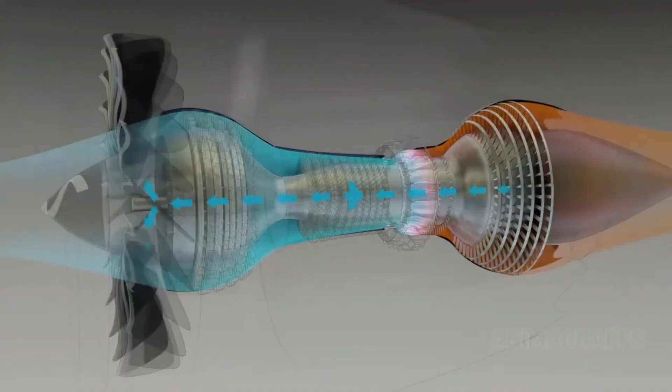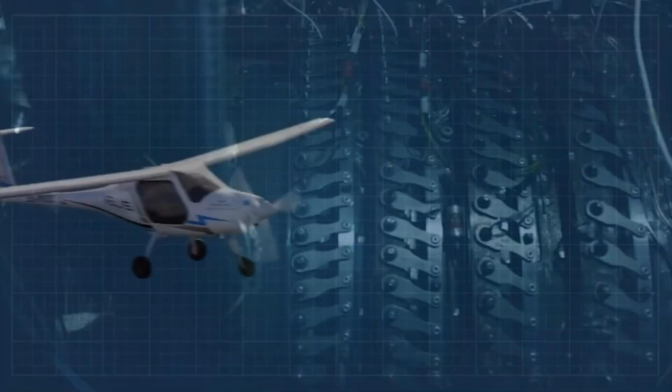We're on the brink of a revolution in aviation. But could this new hybrid engine actually push the industry forward, or will it just leave us grounded in more problems? For years, aircraft designers have explored electric propulsion due to its promise of quieter flights, lower emissions, and reduced fuel use compared to traditional engines.

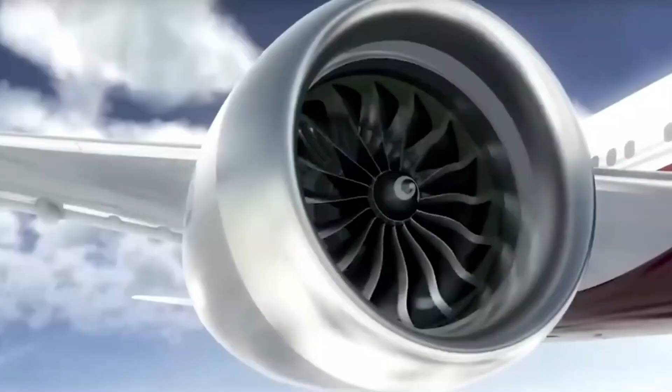However, adopting this technology hasn't been straightforward, mainly because energy storage systems like batteries are heavy and limit how far planes can fly. As the push for greener aviation grows, efforts to develop electric and hybrid electric propulsion have intensified. Since the 2000s, many electric-powered aircraft designs have emerged. NASA predicts that by 2035, commercial planes will start using electrified propulsion systems.

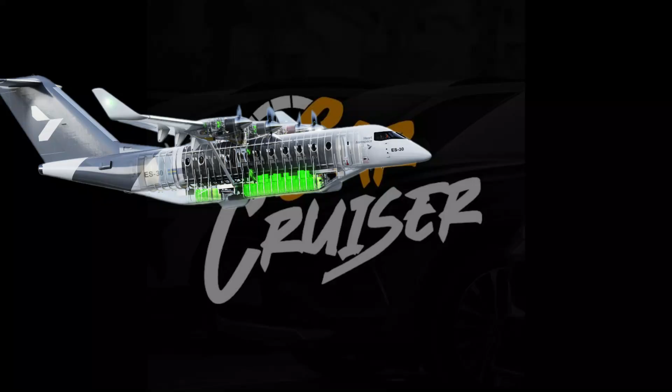A hybrid electric aircraft combines traditional fossil fuel engines with electric motors to power the plane. Typically, electric motors handle takeoff and landing, while fuel engines take over during cruising. The electric motors run on batteries or energy sources like fuel cells. Although HEA technology is still in its early stages, it's gaining attention for its potential to make air travel greener, much like the impact of electric vehicles.

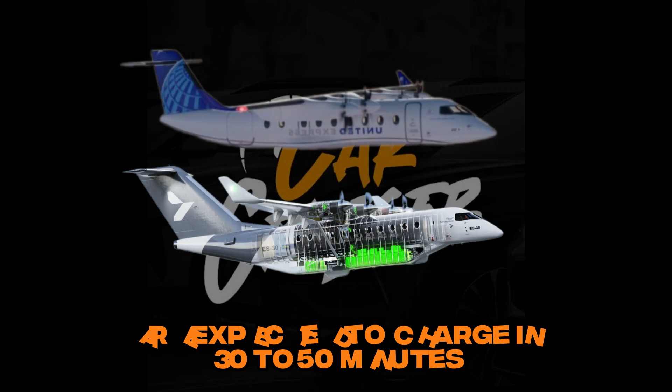Well, charging time for HEAs depends on the aircraft's size and design. For example, Swedish manufacturer Heart Aerospace's Heart ES-30 planes, ordered by airlines like Air Canada, United, and Mesa, are expected to charge in 30 to 50 minutes. In earlier tests, engineers from the University of Cambridge experimented with a hybrid electric plane that could even recharge its batteries mid-flight, showcasing innovative possibilities for this technology.

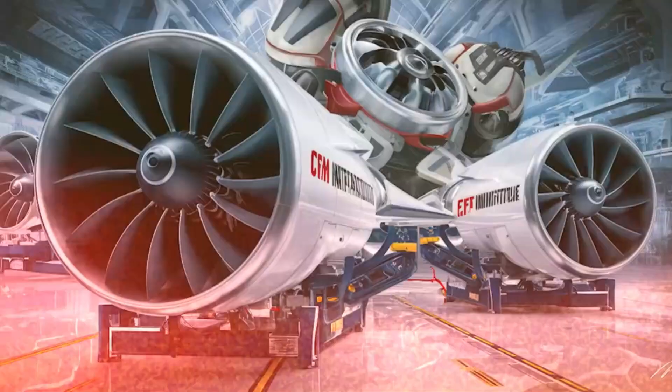The range of a hybrid electric aircraft varies depending on factors like size, weight, energy storage capacity, and flight conditions. The Heart ES-30 can cover 125 miles purely on electric power, or 250 miles when using a turbine generator fueled by sustainable aviation fuel. Other HEA projects are also pushing boundaries.

For instance, Lilium and City Airbus focus on urban mobility. Boeing Aurora eVTOL and Bye Aerospace Sunflyer 2 aim for regional travel. Some business and regional aircraft claim ranges of up to 621 miles with seating for around 10 passengers.

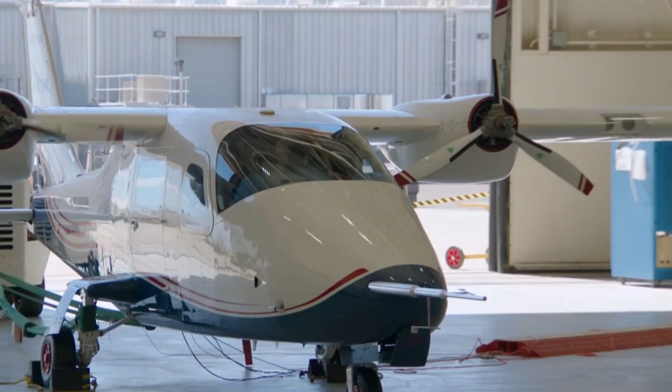The primary fuel source for HEAs depends on the design of the aircraft. Most still rely on aviation fuel, including sustainable aviation fuel, which is a more eco-friendly alternative to traditional jet fuel. But the electric motors, which power key phases of the flight, are typically fueled by batteries. These batteries can be charged using a variety of sources, everything from conventional grid electricity to renewable energy like solar or wind power. The possibilities for charging are expanding, making HEAs a promising option for reducing carbon emissions in aviation.

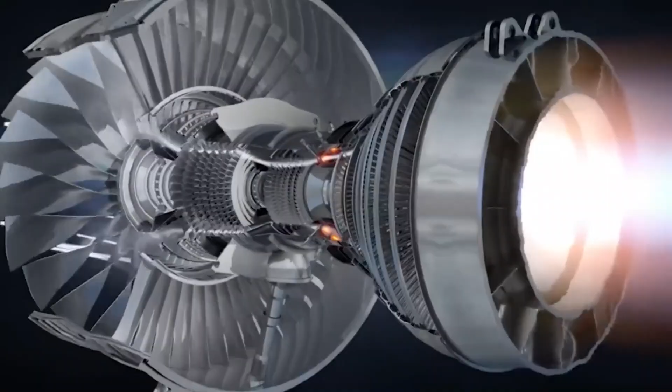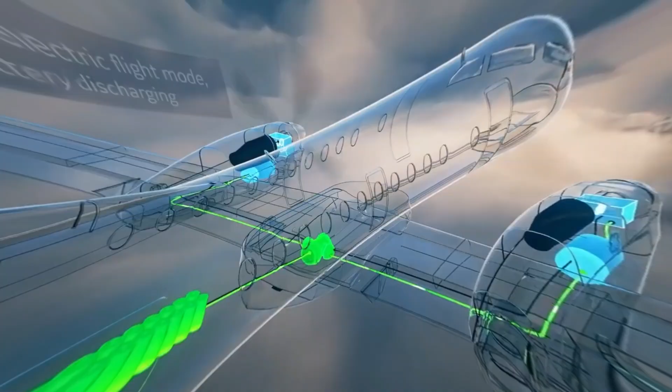Now, a hybrid electric aircraft consists of a few key components working together to make that magic happen. First, the traditional engines provide primary propulsion during the cruise phase of flight. The electric motors take charge during takeoff, landing, and sometimes during cruising to reduce fuel use. The electric motors are powered by an energy storage system, which could use batteries, fuel cells, or a combination of both. There are also electronics to control how electricity flows between the motors, storage systems, and traditional engines, ensuring everything runs smoothly. The control systems make sure the engines and motors work in sync, maximizing efficiency and safety.

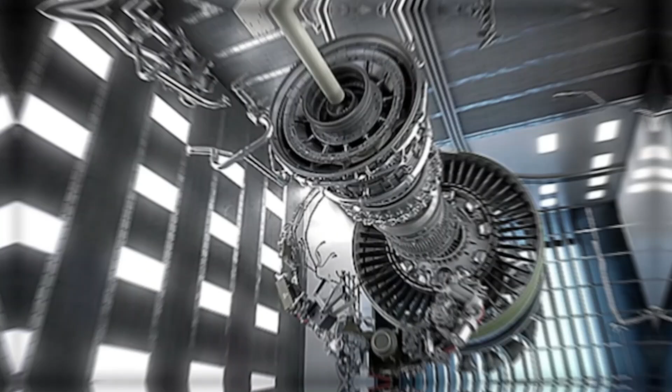Hybrid electric aircraft are designed to reduce fuel consumption, particularly during the fuel-heavy phases like takeoff and climbing. Electric motors provide an extra boost during these stages, reducing the workload of traditional engines. When the plane reaches cruising altitude, the conventional engines can take over. As the aircraft descends and prepares to land, the electric motors kick in again, helping slow down the plane and cutting down on noise pollution.

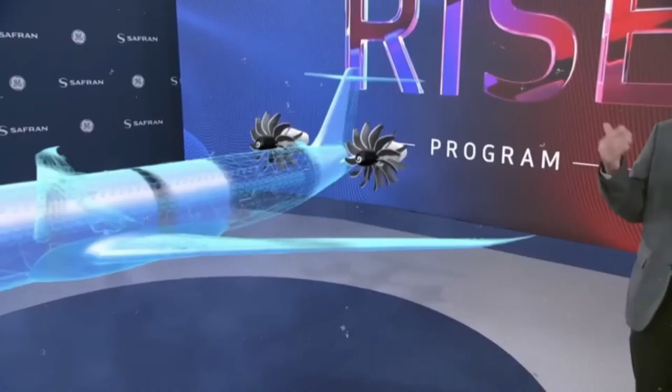This hybrid approach can significantly reduce fuel burn, especially by minimizing the use of traditional engines during takeoff, climbing, and landing. The result? Less fuel consumption and a greener flight experience. It's clear that hybrid electric aircraft are a key player in the future of eco-friendly aviation.

The technology behind hybrid electric aircraft is advancing rapidly, especially in the areas of battery development, electric motor efficiency, and alternative fuel sources. One of the most crucial breakthroughs is the development of lighter, more powerful batteries. These batteries are the key to extending the range of HEAs, allowing them to fly longer distances without the need for refueling. As battery technology improves, HEAs will become more practical and efficient, making greener flights a reality.

But it's not just about batteries. Electric motors are becoming more efficient, meaning the entire propulsion system is operating at higher efficiency levels. Alternative fuels, like biofuels or hydrogen fuel cells, are also playing a significant role in reducing the environmental impact of HEAs, pushing the technology towards even greater sustainability. On top of that, power management systems are getting smarter, optimizing the use of both electric and traditional energy sources for the best performance and fuel efficiency.

Materials and aircraft designs are evolving as well. New materials like carbon fiber composites help reduce the overall weight of the aircraft, boosting its efficiency. Modern aircraft designs, such as distributed electric propulsion or tilt-wing configurations, are offering new ways to enhance performance while keeping things light and efficient.

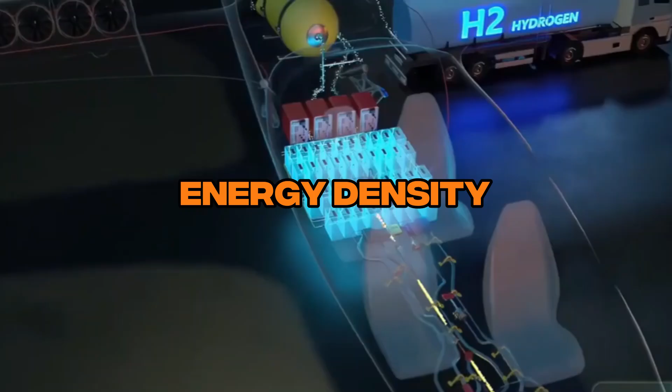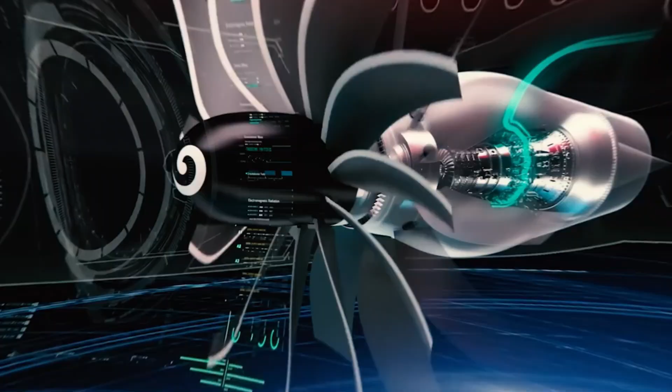But one of the most critical factors in the performance of HEAs is energy density. This refers to how much energy a battery can store for each unit of volume or mass. The higher the energy density, the more energy a battery can store in a smaller, lighter package, which directly improves the aircraft's range and performance. Simply put, batteries with higher energy density can take the aircraft farther without adding significant weight, making for a more efficient takeoff and a longer flight.

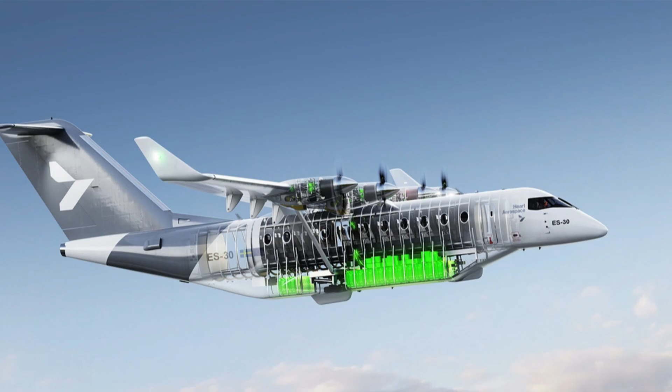As battery technology advances, higher energy density batteries will make HEAs more viable, allowing for longer flights and bigger aircraft. This makes improving energy density one of the most exciting areas of research for the future of hybrid electric aviation.

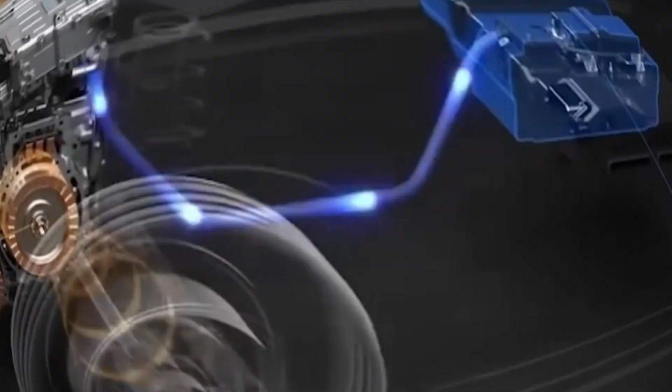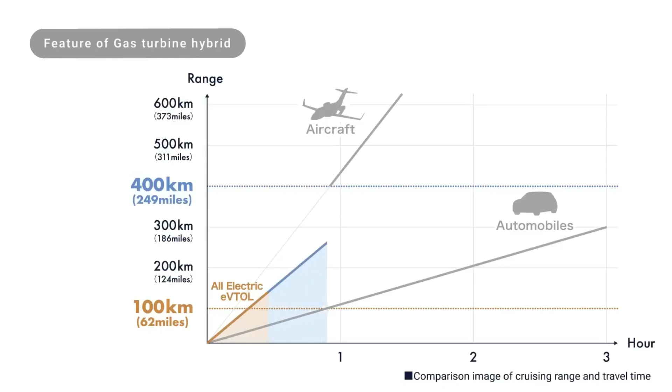While battery technology has certainly come a long way, energy density remains a limiting factor for HEAs, especially when compared to traditional jet fuel. Right now, the energy density of even the most advanced lithium-ion batteries is still much lower than that of jet fuel. To provide the same amount of energy, batteries would need to be significantly larger and heavier, which creates a challenge for the aviation industry, which requires lightweight technology for efficient flights.

That's where the hybrid approach shines. HEAs combine batteries with traditional combustion engines, which help overcome this limitation. However, ongoing research into improving battery energy density is crucial. As technology continues to evolve, HEA's range and performance will continue to improve, bringing us closer to a more sustainable future for aviation.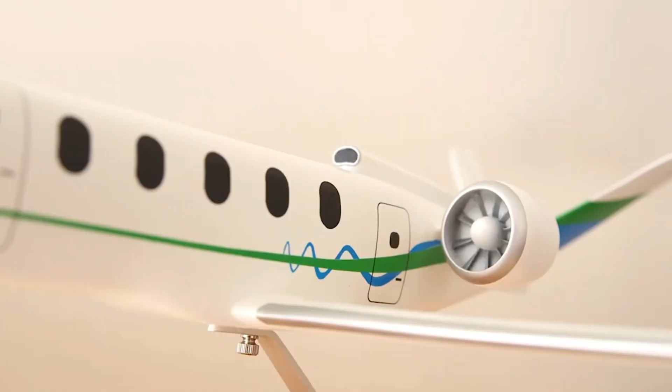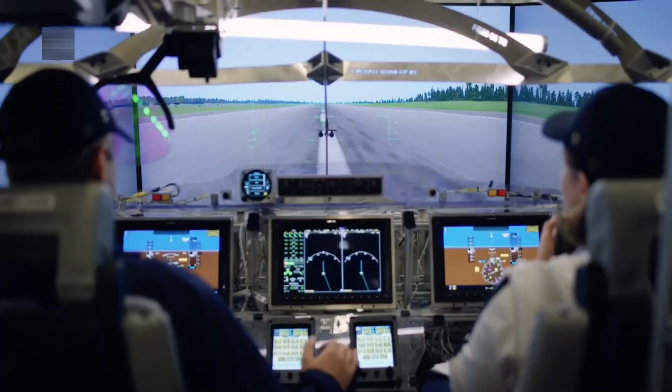Now, the Heart ES-30 is currently one of the most ambitious electric aircraft projects, designed to carry 30 passengers. It's an upgrade from the company's previous model, the ES-19, which could only hold 19 passengers. Although the ES-30 has not yet been fully tested, the engineering team has already conducted tests on the ES-19's electric propulsion system with a ground-based prototype in 2021. For the ES-30, a full-scale test facility and flight simulator have been built, and flight testing is planned for 2026.

In the meantime, other aircraft have completed test flights with smaller capacities. For instance, a modified Cessna Caravan 208B flew for 30 minutes in 2020, solely powered by electricity, with only the pilot's seat on board. Similarly, VoltAero's Cassio has flown in multiple configurations, including options for 4, 6, and 9 seats. For now, the focus remains on smaller, lighter aircraft, but the Heart ES-30 is pushing the boundaries of electric aviation for larger passenger loads.

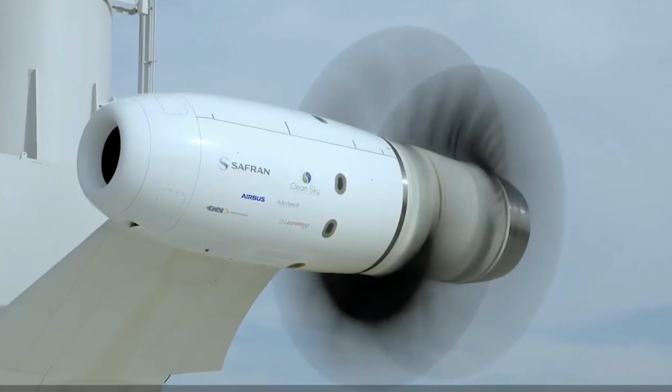Now, electric aircraft rely entirely on electricity, either stored in batteries or generated through solar panels. Electric motors power propellers or turbines, and they come with clear advantages. Unlike combustion engines, electric motors don't lose power at higher altitudes, so there's no need for turbochargers. They're also quieter, cleaner, and need less maintenance.

Well, not exactly. Batteries are much heavier than fuel and have limited range, which becomes critical since recharging aircraft requires ground-based resources. Another issue is heat management. Electric motors release about 20% of their energy as excess heat, which must be effectively cooled.

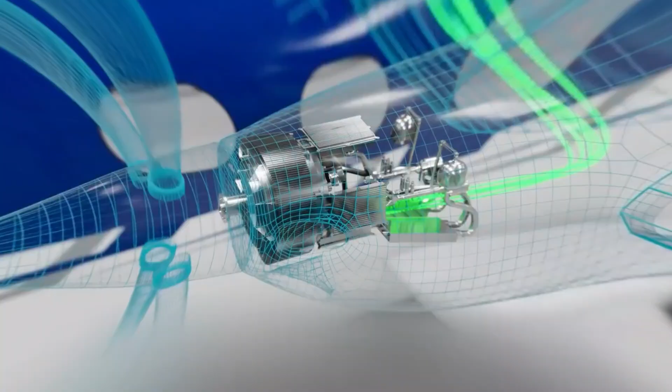So what's being done? To overcome these problems, researchers are working on innovative solutions. Lightweight materials and advanced designs are being developed to improve performance while reducing weight. New power and thermal management systems aim to increase efficiency and keep components cool. Despite the challenges, progress continues, driven by the vision of making aviation more sustainable.

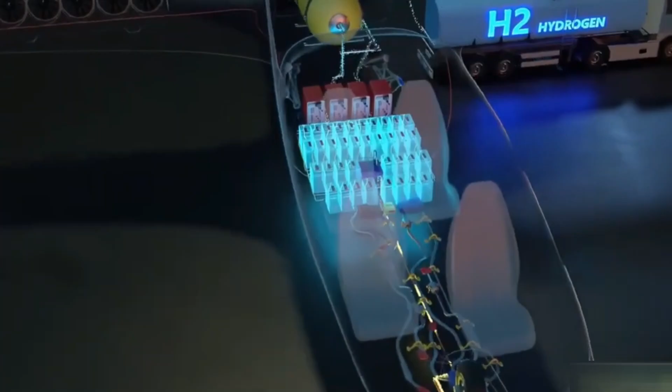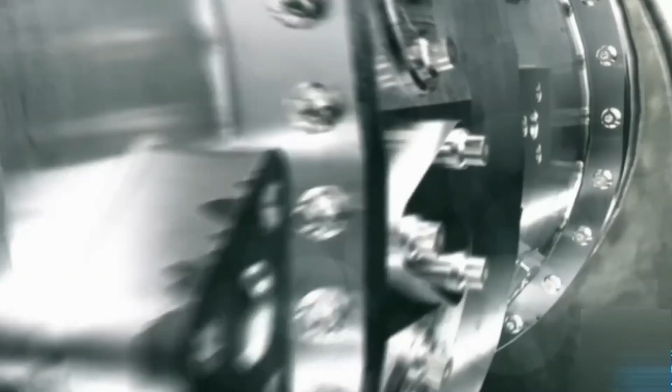Now, hybrid electric aircraft use both electric motors and internal combustion engines, combining the strengths of each to enable longer flight ranges compared to fully electric planes. These systems can operate in two main configurations, parallel or series. In the parallel hybrid system, the electric motor and fuel-burning engine share a common shaft that powers the aircraft's fan. Either or both can provide propulsion, depending on the need. While this setup can save more energy and reduce emissions slightly better than its counterpart, the design is more complex due to the interaction of two power sources.

In the series hybrid system, only the electric motors are connected to the fans. The combustion engine drives a generator, which powers the motors or charges the batteries. Series systems are simpler and support distributed propulsion, allowing multiple motors and fans to be used across the aircraft.

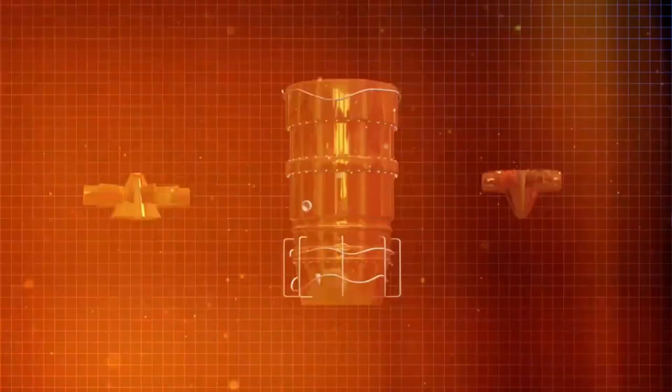In addition to hybrid and electric propulsion, several exciting technologies are emerging that could transform the aviation industry. One of these is solar-powered aircraft. These planes use solar panels to capture sunlight and store energy in batteries or hydrogen for when the sun isn't shining. While solar-powered planes aren't yet practical for commercial flights due to power limitations, they have already proven effective in uncrewed aerial vehicles, which can fly for months at a time, although at low speeds. These UAVs could be useful in areas like telecommunications and imagery.

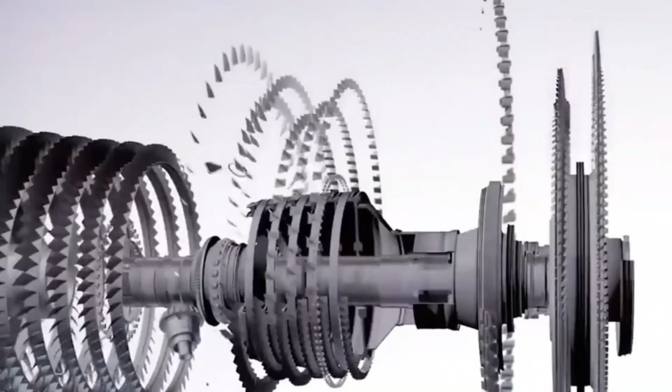Another promising technology is turboelectric propulsion, where gas turbines generate electricity to power electric fans. This system could help cut down on emissions. There's also a variant called partial turboelectric propulsion, where a mix of electric motors and gas turbine provides the necessary thrust.

Lastly, electric VTOL, or vertical takeoff and landing aircraft, are being developed to take off and land without needing runways. These electric-powered vehicles could revolutionize urban air mobility, providing on-demand air taxis, regional transportation, and freight delivery, opening up some new possibilities for fast and efficient travel in cities.

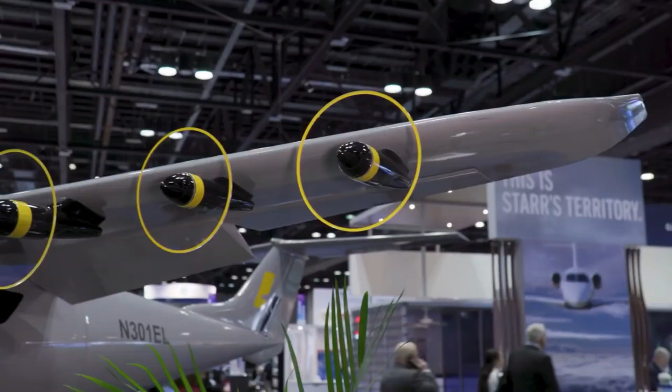You see, building and flying a hybrid electric aircraft comes with significant challenges, especially when it comes to designing the hybrid propulsion system for maximum efficiency and performance. But the problem doesn't stop there. Creating new aircraft designs for HEAs is a complex and expensive process that needs to meet strict safety and performance standards set by aviation authorities.

Since HEAs are based on emerging technologies, there's often no clear regulatory framework in place, which makes getting them certified a longer and more difficult process. On top of that, new infrastructure, like charging stations, is needed, adding to the costs.

To tackle these obstacles, engineers and researchers are working on several fronts. They're developing more efficient electric motors and improving the integration between electric and traditional propulsion systems. The goal is to create aerodynamic designs that reduce drag and increase efficiency, making the aircraft more sustainable and practical.

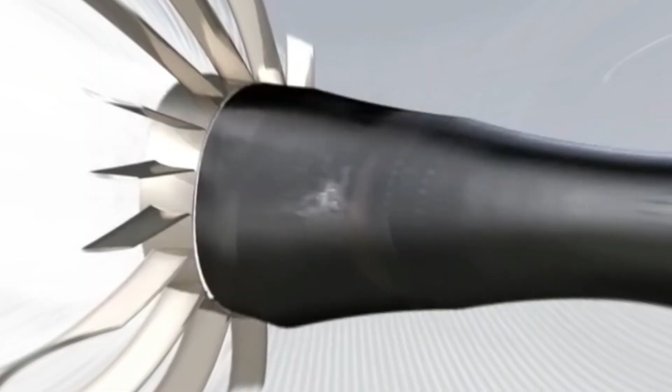In terms of materials, research is being done to develop stronger, more heat-resistant materials that can withstand the extreme temperatures and pressures found in aviation. Meanwhile, on the regulatory side, aviation authorities are working to create the standards, certification processes, and infrastructure needed to support the growing HEA market.

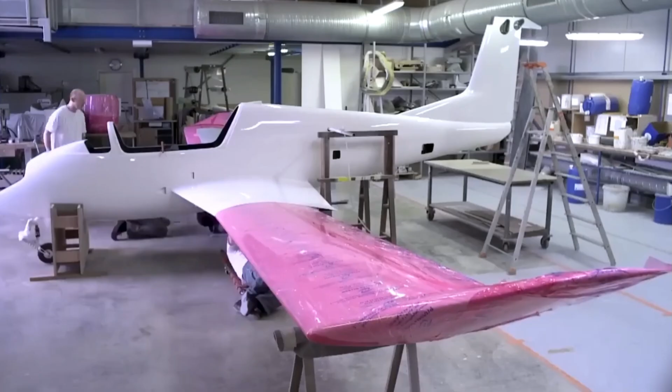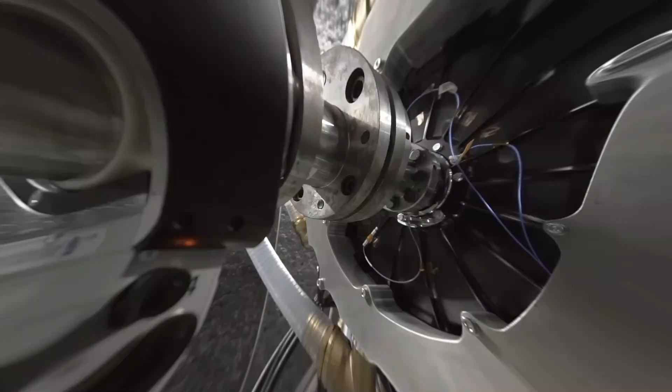Several companies are in the race to develop hybrid electric aircraft, each taking a unique approach to integrating electric propulsion systems into aviation. And Heart Aerospace is leading with its ES-30. Airbus created the E-Fan X, a hybrid electric aircraft demonstrator in partnership with Rolls-Royce and Siemens. Unfortunately, the project was cancelled during the pandemic, but still demonstrated the potential of hybrid electric technologies.

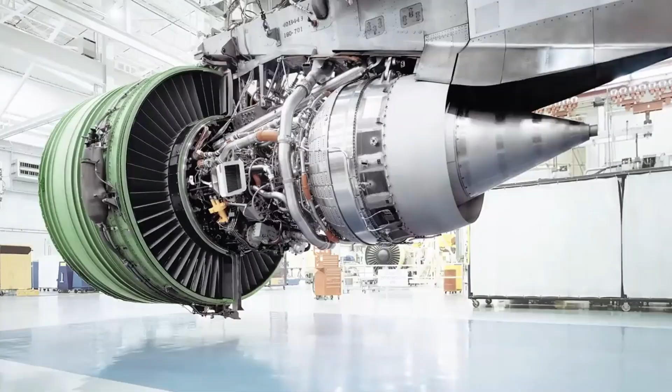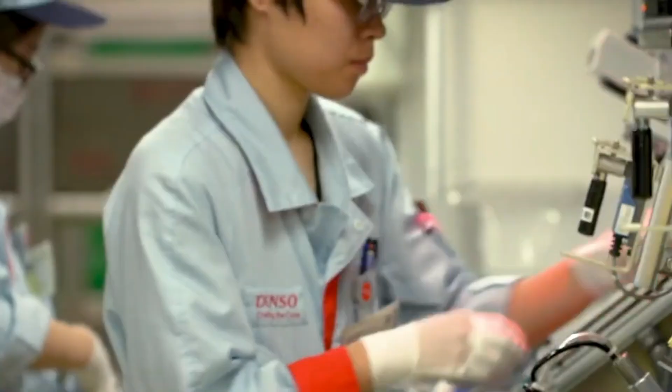Boeing is working on a hybrid electric propulsion system for aircraft. They've been modifying a test aircraft and supporting the development of a megawatt-class hybrid electric propulsion system with GE Aviation. Sikorsky Aircraft, known for its helicopters, is developing a hybrid electric VTOL aircraft. Their Sikorsky Autonomy Research Aircraft is a reconfigured version of the S-76B helicopter, showing how hybrid electric systems can be adapted to different types of aircraft.

Earlier this year, ZeroAvia made strides with its Dornier 228, a testbed aircraft where one turboprop engine was replaced by a hydrogen-electric powertrain, featuring fuel cells and a lithium-ion battery. This marks a significant step towards cleaner, more sustainable aviation.

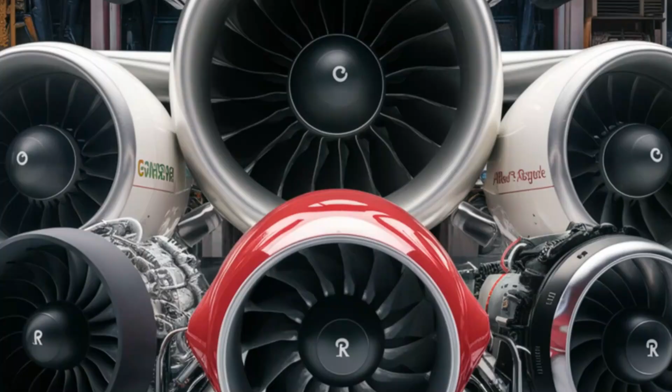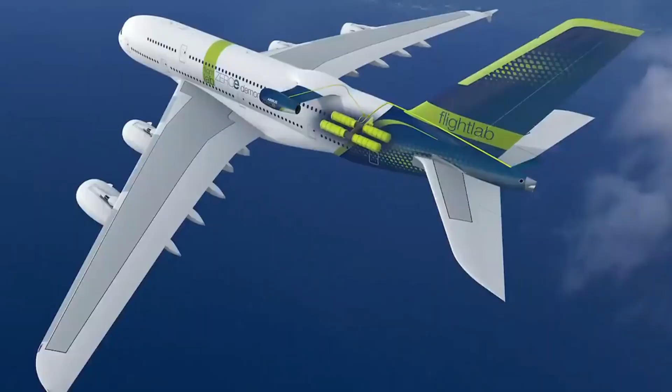Well, they're optimistic about the future of hybrid and electric aircraft, particularly in smaller settings. Industry leaders believe that HEAs will be first used in short, urban commuter routes, paving the way for larger, scalable technologies. Gökçin Çınar, a professor and aerospace engineer, sees hybrid propulsion systems as a promising option, especially for regional aircraft in the 2030 to 2035 timeframe. She notes that using batteries during takeoff and climb could significantly reduce fuel burn, with hybrid systems providing a mid-term solution for larger jets.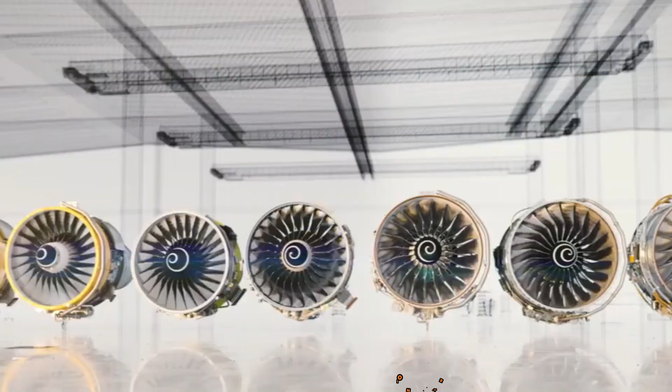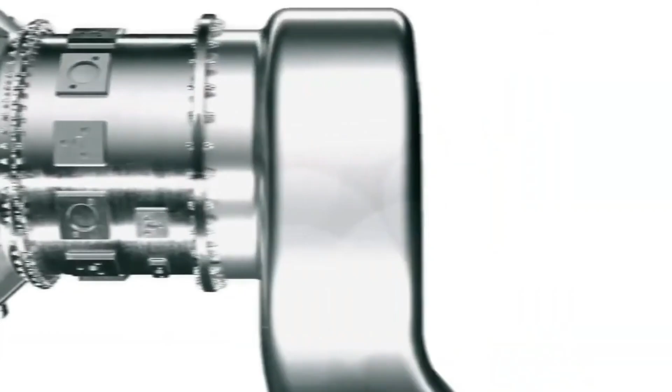The widespread use of HEAs could have a profound impact on the aviation industry. Environmental benefits stand out as one of the biggest advantages. HEAs could drastically reduce emissions, helping fight climate change and air pollution, both growing global concerns. For airlines, HEAs could reduce fuel consumption and maintenance costs, making air travel more affordable and accessible. These improvements could lead to faster, more reliable flights with fewer delays.

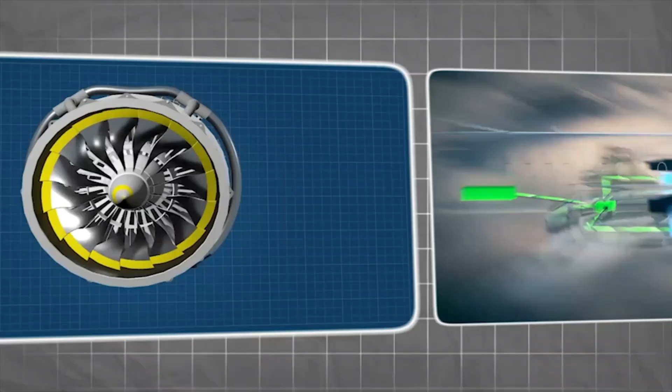The addition of VTOL technology and short-range, affordable travel could open up new routes and destinations, especially in underserved areas. HEAs are also quieter than traditional aircraft, reducing noise pollution around airports, particularly during takeoff and landing. But developing large passenger HEAs requires overcoming significant technological and regulatory challenges.

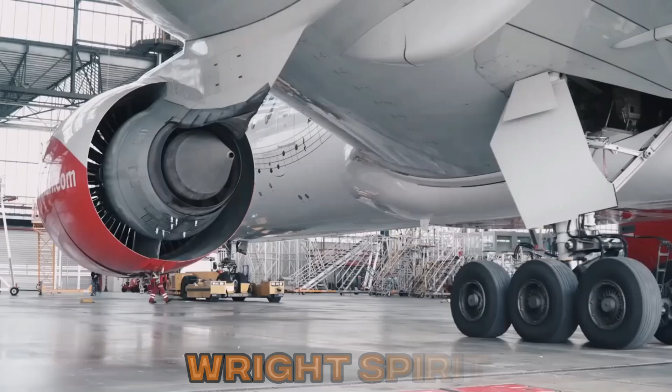However, companies like Wright Electric are aiming high. They're working on a 186-seat commercial jet with an 800-mile range, expected to launch by 2030. Additionally, their Wright Spirit, a 100-seat electric aircraft, could take off by 2026, marking a huge step in the future of hybrid electric aviation.

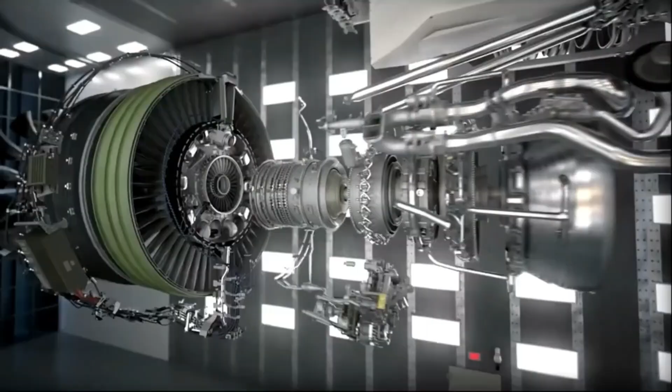Now, what do you think about the future of hybrid electric aircraft? Do you see them replacing traditional planes soon?